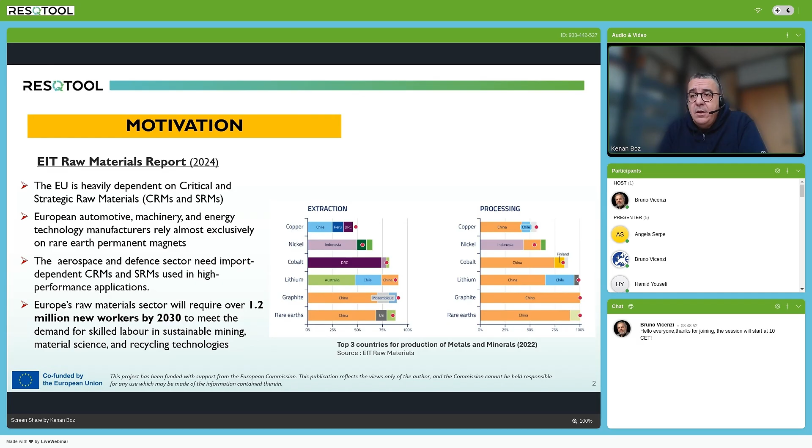And indeed, here's an interesting finding I wanted to put here: the raw materials industries in Europe will need about 1.2 million new workers by 2030, within just 5 years, to meet the demand for skilled labor in sustainable mining, material science, and recycling technologies.

So the Critical Raw Materials Act is more or less the basis of our project, the reason why the project has been funded by the European Commission. For those who don't know, the Critical Raw Materials Act is one of the most important policies of the EU, published in 2023. You can find it online and download it.

What it says is that there are some targets on the extraction, processing, and recycling of critical raw materials to increase domestic capacity: 10% for extraction, which includes mining mainly, 40% for processing, where Europe is really strong, and 25% for recycling, that is the end users such as aerospace and others. Also a diversification in sourcing of critical raw materials from outside the EU, not exceeding 65% from a single third country.

On the right side you see the critical raw materials that are in the scope of this project. That is mainly tungsten and cobalt, as well as titanium, niobium, and tantalum, which we are looking after.

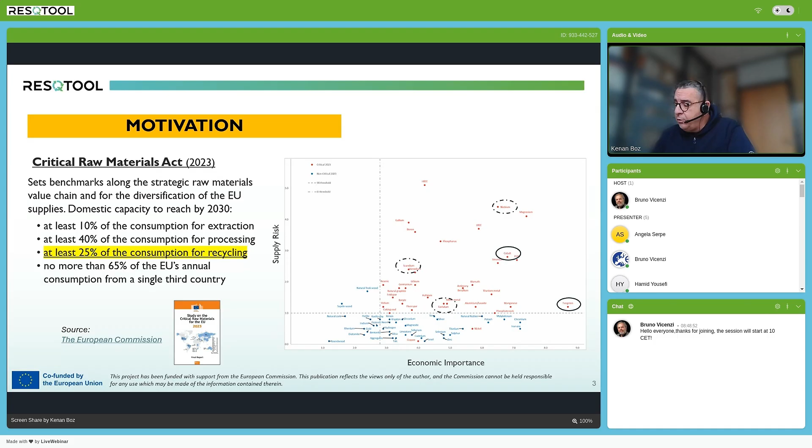So what is the motivation for the project? The third reason is a need for digitalization, that is product coding. The EU regulations on waste management for collection and transportation of hard metal scrap are really complicated, especially in northern countries such as Germany, Sweden, Norway, and Finland. So we are working on identifying hard metal scrap as a valuable secondary raw material among other scraps in the metal industry.

So coming to our project, it has a global objective of offering a sustainable and energy efficient solution for recycling and supply of critical raw materials, mainly tungsten and cobalt. But we're also working on tantalum, titanium, and niobium from end-of-life products, what we call hard metal scrap, but we don't want to call it scrap anymore, as we consider it a secondary source of raw material. These end-of-life products come from cutting tools, construction, and manufacturing devices such as drilling bits, etc.

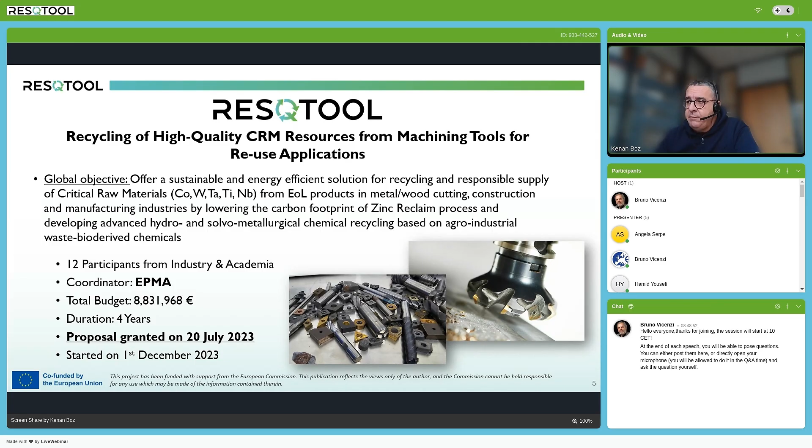So as of today, this is our current value chain of hard metals, starting by the product design and the supply of raw material, where tungsten is mainly coming from China, cobalt is coming from Congo. We make the tool production in Europe, and they are used in automotive, mining, metal, wood cutting, and other industries. In the end, the scrap is collected, and unfortunately, as of today, there's a kind of downcycling, which as a project we are trying to avoid.

What we mean by downcycling is either alloying of tool steels, where the hard metal scrap is used, or hard facing for reuse, let's say.

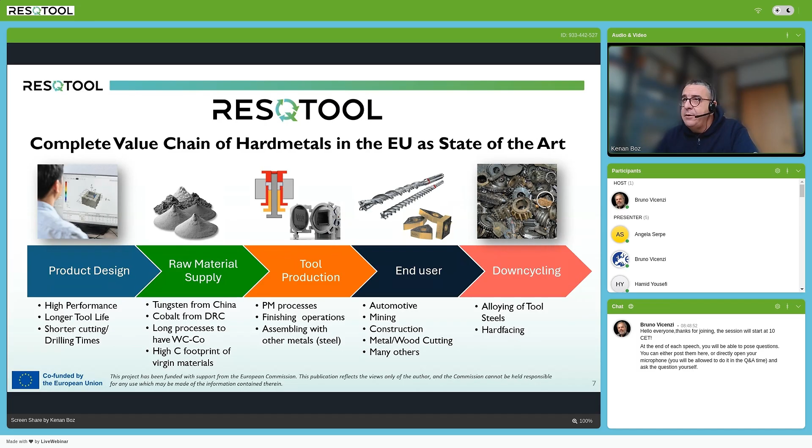So how we do it: we first identify the scrap sources by their users in the industry, and we have assigned a certain recycling code for each group to be used to determine their recycling scheme.

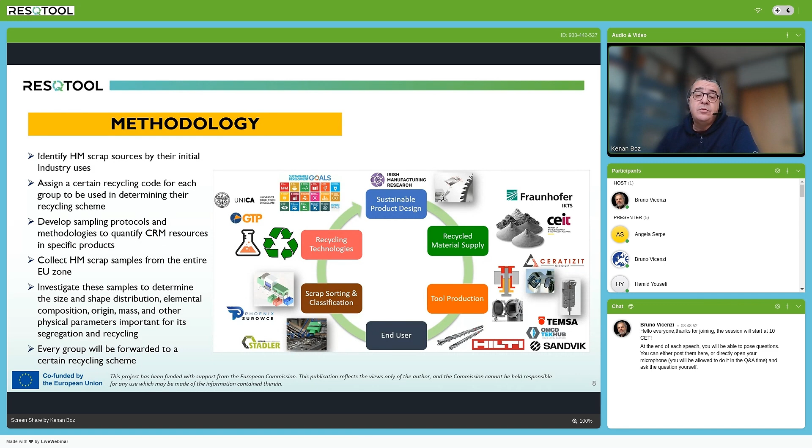We also have investigated samples that we have collected by their size and shape, composition, origin, mass, to develop the proper coding in terms of recycling as well as other projects. These codes are used for product identification mainly, but we want to include recycling detail there as well. So this is the methodology of the project.

We have defined our main framework of data where we get the hard metal scrap, and then the methods of sorting and classification, and then we have the recycling technologies development. That is, of course, all the time followed by characterization of the powder and the assessment of the final products coming from real case studies in our consortium partners.

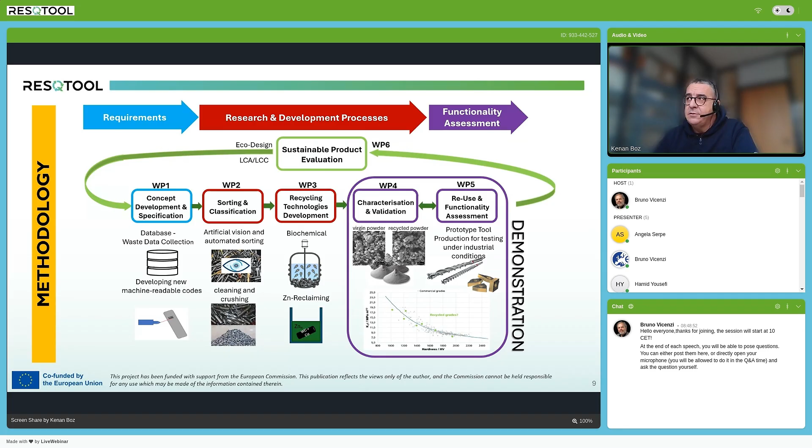And of course, all this is evaluated under the sustainability aspect using LCA methods and eco design. So today we will have two important presentations on two different recycling methods. But before that, I would like to give you a short description about the sorting and classification, which is very important as well.

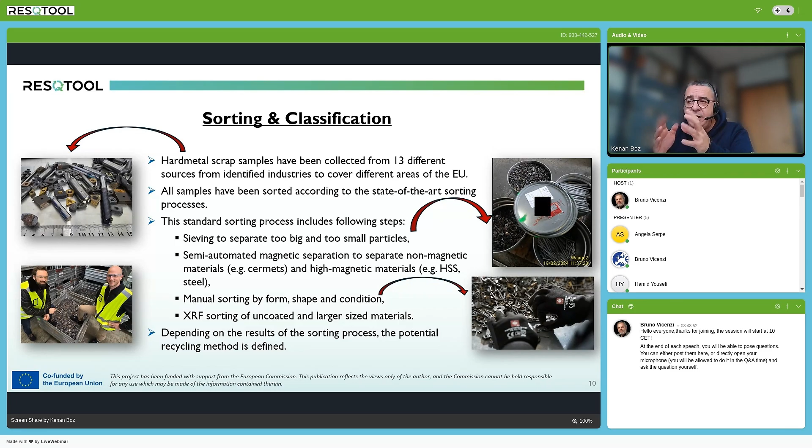We have collected samples from different countries, 13 different countries around the EU, and then we sorted them to figure out the sizes, the shapes, etc. We use different methods like magnetic separation, sieving, etc., even manual sorting to understand. We used XRF devices for uncoated and large sized materials, and we try to determine which recycling method is good for each category, let's say.

In the project, we are mainly working on developing a coding system to be used for hard metal products, and the EPMA is even leading a proposal for a standard at ISO level for that. As a consortium, we are working on the GS1 data matrix standard.

We have two main geometries of data matrix: one square, one rectangular. The square one is used for flat surfaces like cutting inserts. The rectangular one is used for rather rounded surfaces like drilling bits, milling edges, milling tools, etc.

As I said, our goal is to have a product coding that is a kind of product passport for each product, each unique with their own unique ID in terms of traceability and recycling.

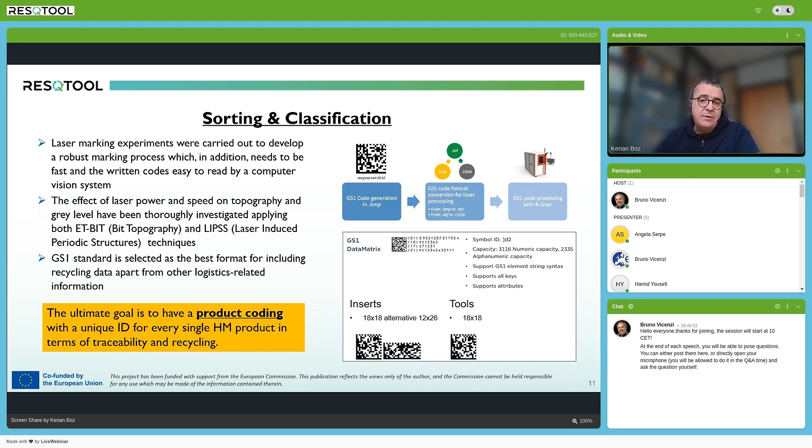So finally, basically this is the automated sorting unit we have developed within the project. As you can see, it detects the data matrix code, and depending on its chemical composition or coating, etc., it separates into different classes, where afterwards they are forwarded to certain recycling schemes.

So we have reached, well this is old news, this slide was prepared 6 months ago so I have to update it. The unit has now reached 97% accuracy, and our goal is to reach not 100 but 99.9% accuracy, so that during sorting there is no mistake, that a cutting tool is not put into the box of milling tools, for example.

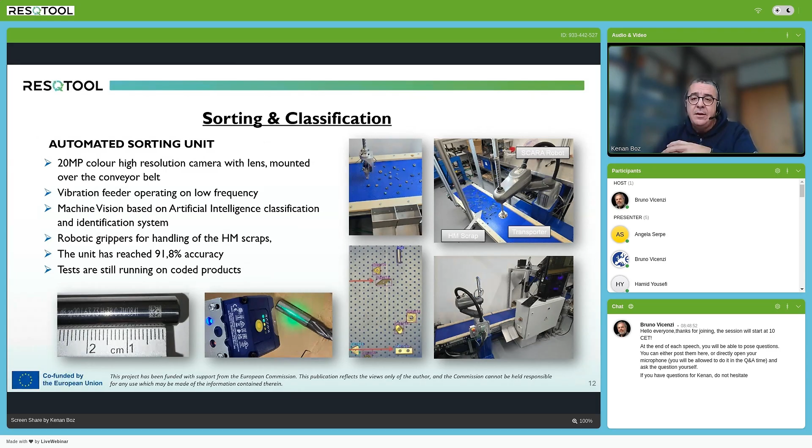So that's all from my side. Thank you very much. I would like to answer your questions at the end of the session, but now I would like to give the floor back to Bruno, because we have two important speakers after me.

Well, yeah, actually if there is any quick question now we could take it, but otherwise there will be time at the end. I don't see anything in the chat. If anyone wants to speak, I will switch briefly to discussion mode so you can switch on your microphone and camera if you want. Otherwise we will move to the next speakers. I don't see any questions yet. Okay, so maybe there will be more questions on the technical side, I guess. Yes, probably. Right, so thanks then, Kenan.

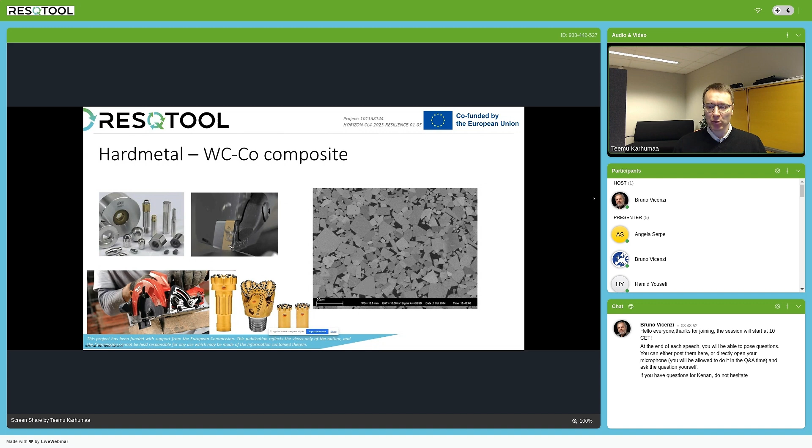As you know, hard metal tools and parts are produced via powder metallurgical methods. So the raw materials are all in powder form, tungsten carbide and cobalt, but other carbides or even other binder phases can also be used.

The materials are mixed and milled typically in an attritor or ball mill. The powders are granulated so that they are free-flowing, and after that there is typically a quality control step where microstructure, carbon balance, flowability, etc. are measured and controlled. The powders are compacted with various methods.

After compaction there might be a step of green machining, if for example cold isostatic pressing was used to press larger blocks, and out of these blocks some shapes which could not be pressed directly are formed. Then after sintering, the hard metal gets its actual properties, having the hardness, porosity, transverse rupture strength, etc.

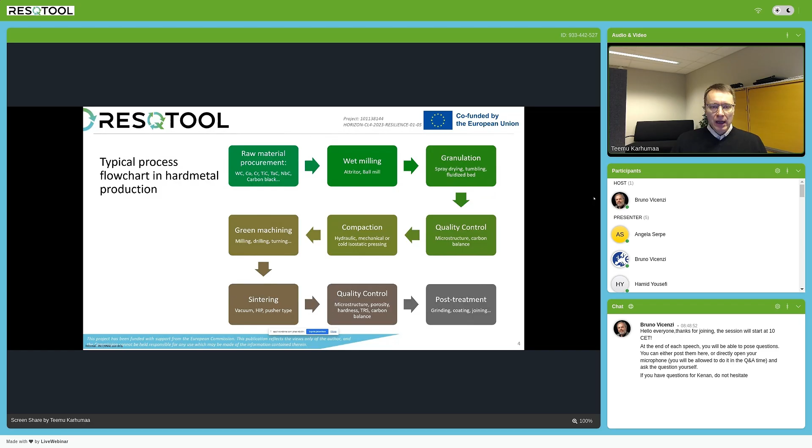Tungsten recycling market, as Kenan described, is extremely important for the European Union because Chinese mining companies control the majority of tungsten production globally, and yes, there are already existing recycling methods. About 35% of global tungsten streams comes from recycling already at the moment.

About 65% of all tungsten produced globally goes for tungsten carbide products, so hard metals. So recycling of hard metals is indeed very important to reduce the dependency on imported tungsten in the EU.

As Kenan described, we try to develop a standard for marking of tools so that they could be better recycled. In this case, we see the losses that are currently taking place here on the right side. I hope you see my pointer. A high amount of tungsten goes to losses.

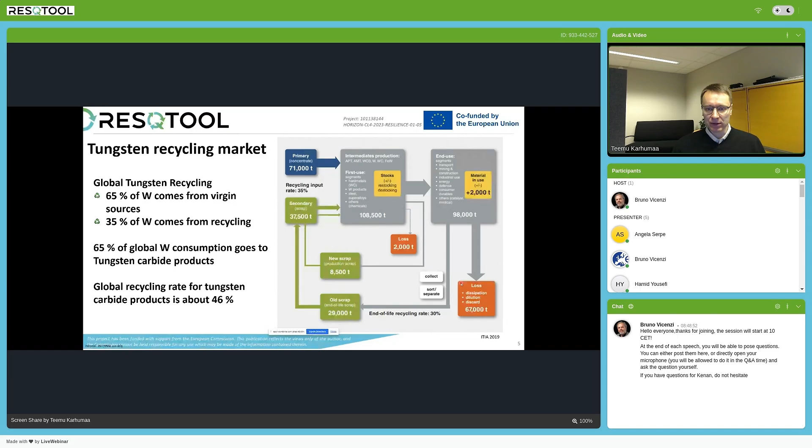Hard metal scrap can have different shapes, forms and geometries. In this case, we have here, just as an example, some metal cutting inserts or cold forming tools, mixed scrap from any kind of applications, drills and end mills, mining buttons, or blocks from EDM machining.

Currently, the sorting of hard metal scrap is done manually based on the application. So the person doing the sorting recognizes this is indeed a metal cutting insert, or this is a drill or end mill. They put them into the different categories.

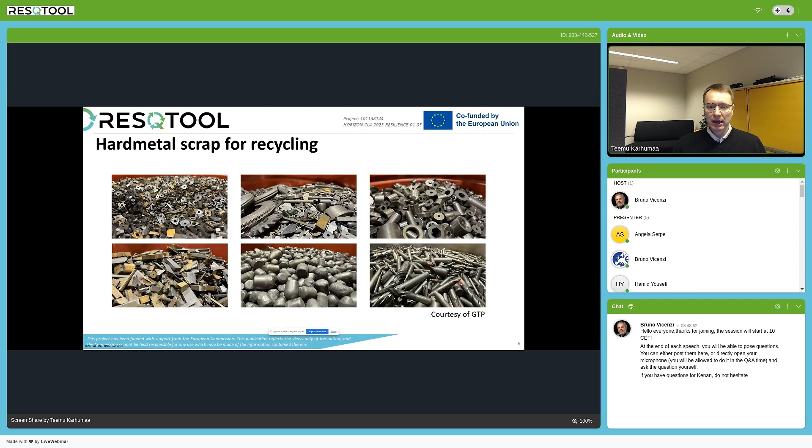But if there is no application known, then all this material goes to mixed scrap, and this share we need to improve. So by marking the tools, we can recognize the hard metal grade composition, tungsten carbide grain size behind, and these scrap grades can be better recycled in the future.

There are also hard metal scraps, or tungsten containing scraps, in the market which are called soft scrap. So they can be turnings from machining of tungsten containing materials, then sludges from grinding of hard metal drills and end mills, for example, or any kind of powders which were generated during the production of hard metal parts.

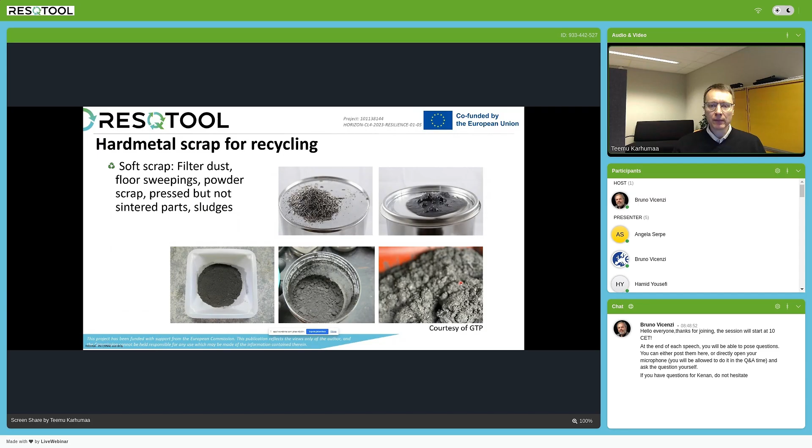All these scrap or secondary raw materials, as Kenan mentioned, can be recycled via several methods, and here I try to describe three different methods. But if we look at the big picture of hard metal tools and how the hard metal recycling value chain looks like, everything starts, of course, with tool design.

It's actually a very important phase where many characteristics of how the hard metal can be recycled afterwards are already defined. But after using the hard metal tools, they reach end of life and can be either reused directly, like grinded and coated again, or they can be crushed, with material going to hard facing, or then they can be leached.

So solid hard metal tools can be leached. The material which was leached away goes to different chemicals, and the remaining tungsten carbide goes to tool production again.

Zinc processing is just a crushing and grinding process, which I will describe later. Via chemical recycling, all kinds of hard metal or tungsten containing tools can be recycled.

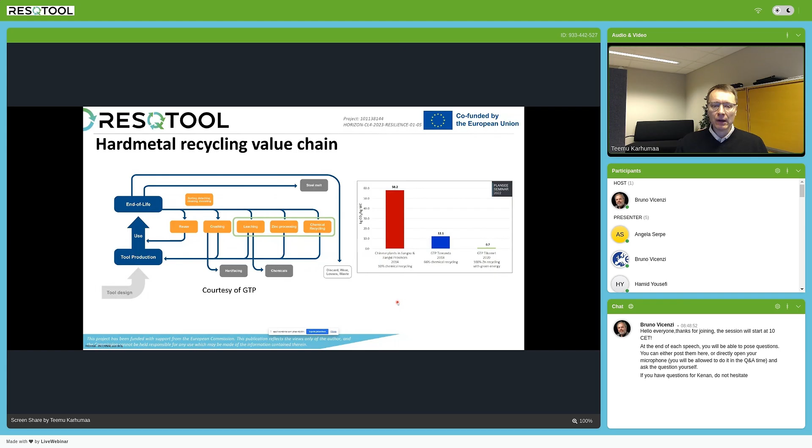Under the RESQTOOL project, we try to evaluate with colleagues from IMR the CO2 emissions from the process in more detail. So these are the 3 recycling processes which I'd like to describe a bit more in detail.

Leaching of sintered hard metal scrap: the cobalt binder of the hard metal scrap can be removed. We use strong acids, and after leaching of the binder, the remaining tungsten carbide mass or powder can be used for the production of new tools.

In the leaching of sintered scrap, there are some challenges because the leaching time can be very long due to the long diffusion lengths, and the tungsten carbide grains may oxidize. Coatings may create some diffusion barriers as well, and if there are nickel binders or chromium molybdenum in the binder as a grain growth inhibitor, they may complicate the required chemistry even further.

Then zinc processing, as I already said, is more or less a crushing and grinding process. Zinc just makes it easier to crush the sintered hard metal parts. There's nothing more than making the sintered scrap back into powder form. You see here how the scrap looks before and after the zinc processing, and then how it's in powder form after the processing. I'll describe a bit more detail about how that happens in a couple of minutes.

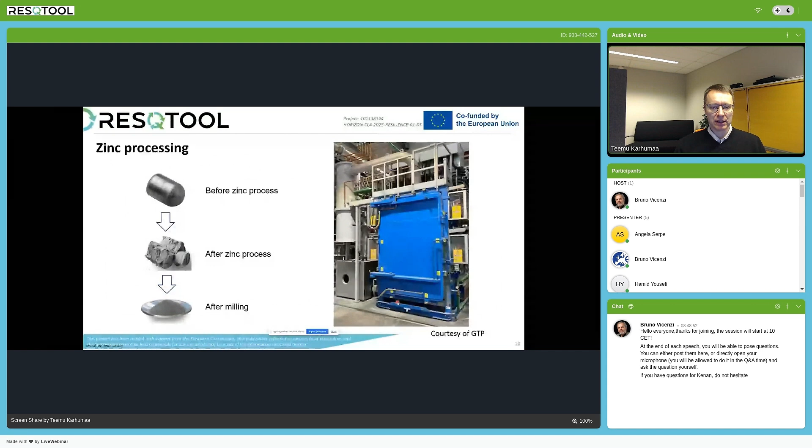Then the full chemical recycling method, which is normally utilized and owns the majority of the market share in the hard metal recycling market: the tungsten carbide, cobalt, and other elements are oxidized and dissolved into sodium hydroxide, and then there are complicated steps of solvent purification and filtration, and then ammonium paratungstate is the outcome from the hydrometallurgical processes.

This is then calcined to tungsten oxide. The tungsten oxide is reduced to tungsten powder, and this is then carburized to tungsten carbide powder. As you can imagine, with 3 different pyrometallurgical steps and many hydrometallurgical steps before that, the energy consumption of chemical recycling is indeed very high.

But it's only the method, more or less the only method, to recycle soft scraps and sludges, or very contaminated tungsten-based secondary raw materials. On the other hand, the quality after chemical recycling is the same as from virgin raw materials, so high quality and high purity materials can be achieved.

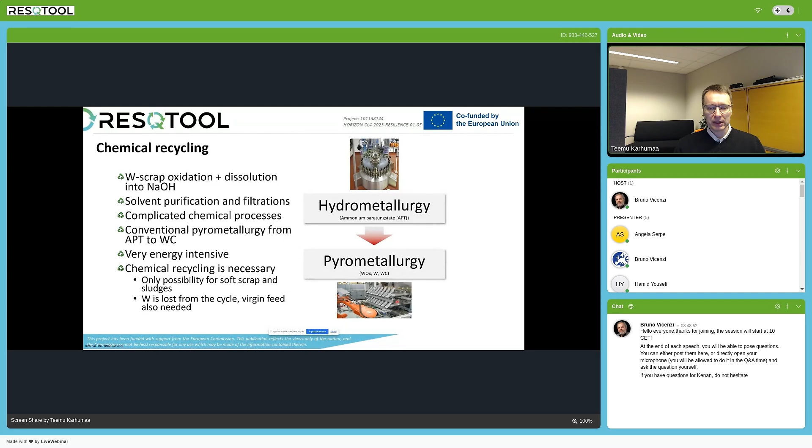Then I would like to touch a little on the zinc processing history. The earliest patent or publication on zinc processing comes from the year 1944, where a company in UK described how hard metal scrap and zinc, put in an oven together, formed a zinc-cobalt alloy, and they described how this alloy of zinc and cobalt can be dissolved with sulfuric acid, and the remaining tungsten carbide can be recovered and used in the production of new tools.

This process was not utilized on a very large scale until Paul Barnard in 1971 patented a process continuation for it. The distillation of the zinc instead of leaching improved the process a lot, and then that process started to gain market share.

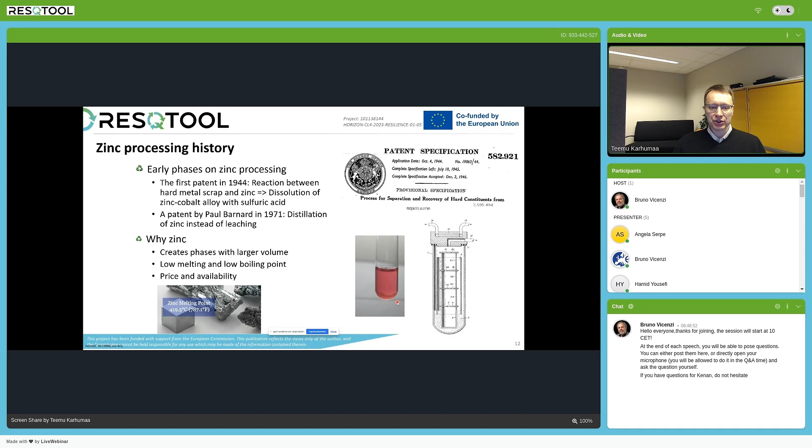This process was more or less designed and developed in the US by two companies, Metallurgical Industries and Wah Chang Teledyne, in Huntsville, USA. One furnace from Metallurgical Industries came to Belgium, to Coldstream, later Höganäs. Once Höganäs decided to discontinue hard metal recycling in Belgium, they sold two second-hand furnaces to a powder customer in Finland, which was at that time named Tikomet. That's why we are working with zinc processing here at GTP Finland.

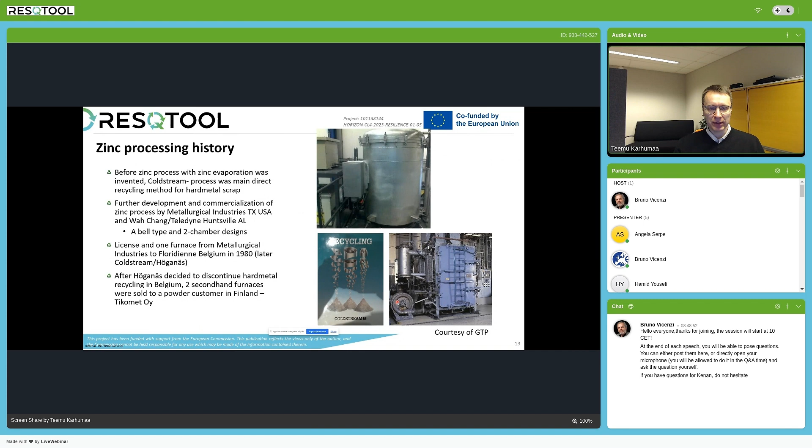Tikomet was founded in 1994 for production of hard metal pins for winter tire studs, which you see here in the right pictures. Raw material was initially acquired from Höganäs in Belgium, so zinc recycled powders. Then in 1995, the production of hard metal powder via zinc processing started with one furnace, and we have increased capacity since then, step by step.

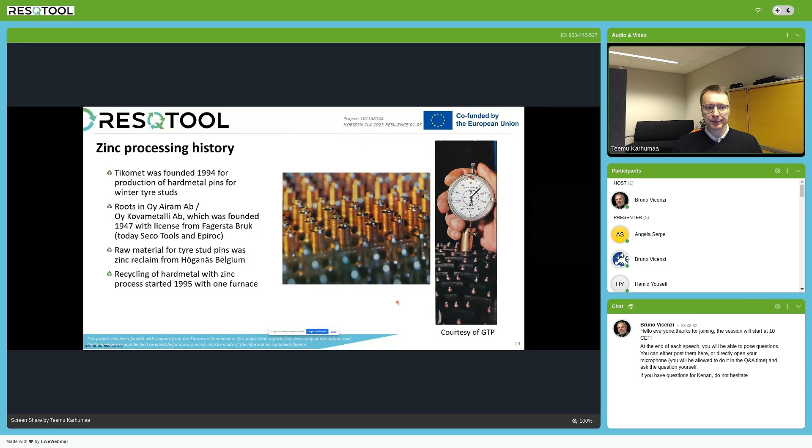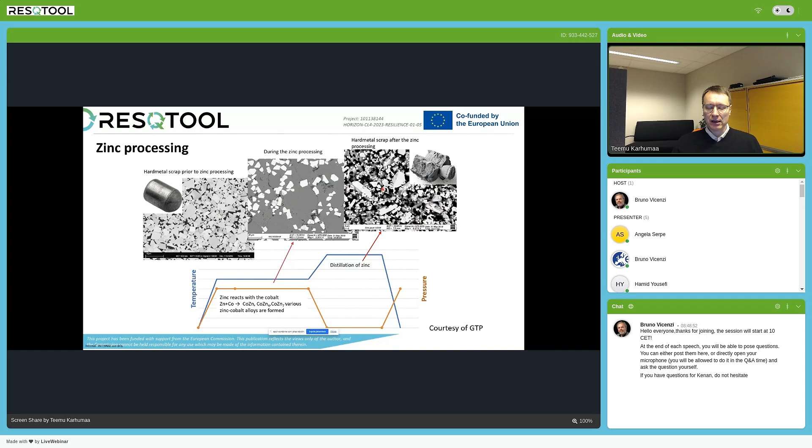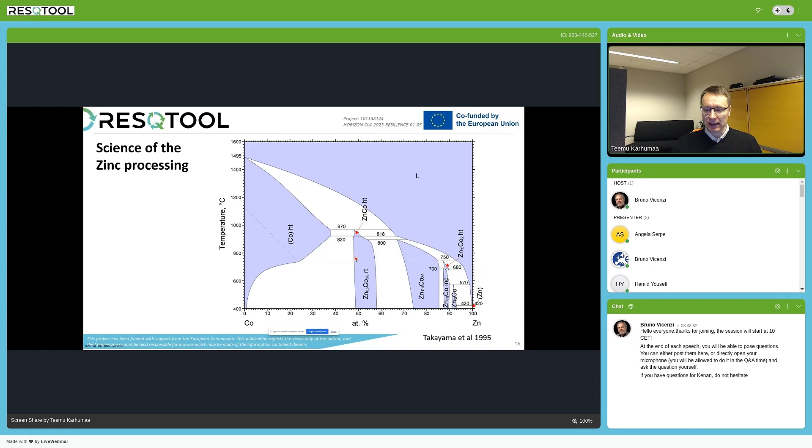We can also have phases in the structure which have a higher amount of zinc, and on the other hand, we know that there is also dissolution of the cobalt from the hard metal parts into the molten zinc. So in this case, we start moving from this part of the diagram towards the center. So we have multiple phases existing at the same time in the reacted material.

Going back once again, after this reaction has happened, as I described earlier, there is an evaporation step during the zinc processing, and the zinc is evaporated and then recovered afterward. So the zinc used for the process is used again and again. Only a small amount of zinc is lost and needs to be replaced.

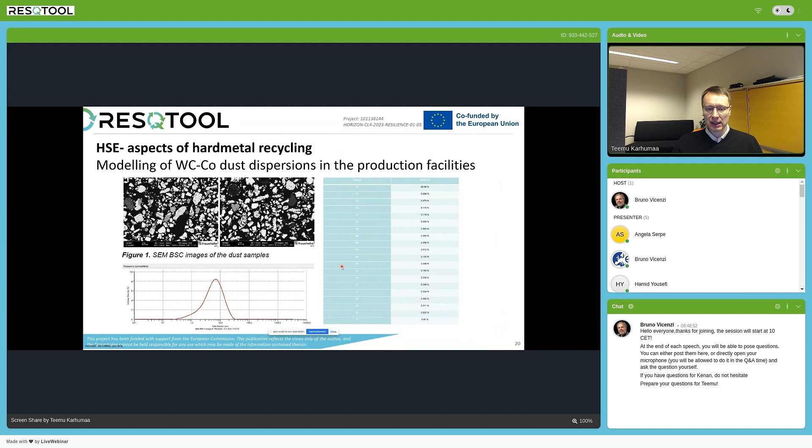Then we carried out computational modeling of how we measured all the airstreams coming in and leaving out from the production facility, and checked how that dust would spread with the airstreams. We were surprised how high in the production facility the dust can go and how long it can stay in the air.

Now we are thinking about measures to prevent the clean and dirty air from mixing, so that we could keep some areas more clean where the employees stay, and remove the dirty air at other areas.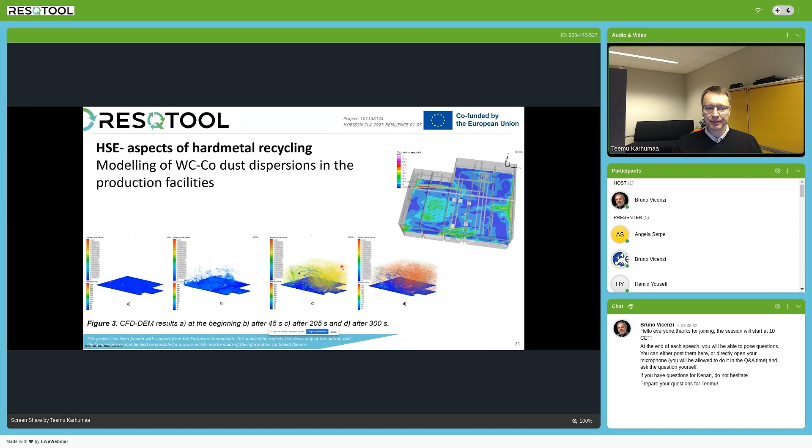We have measured the dust concentrations in various places in the production facility, and indeed there are some peaks - not very high, but we still recognize there are differences in the dust concentration. Some days can be very good, with very low concentration, but on some days the concentration can be very high, and we need to find out the reasons for these dust leaks.

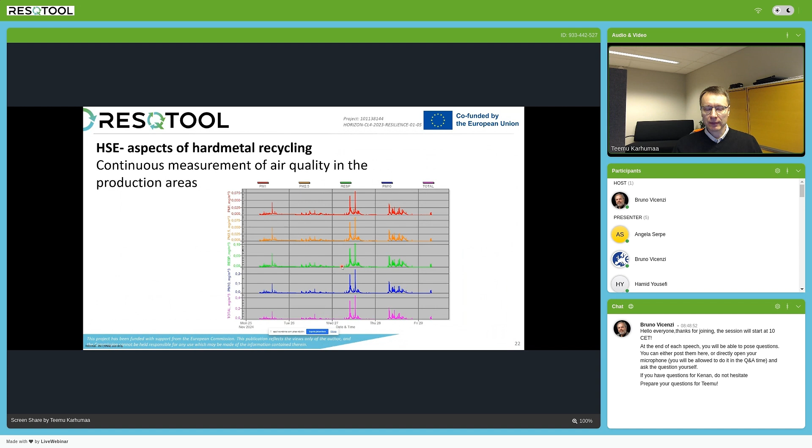The last point I'd like to discuss a little is the energy consumption of hard metal production and in recycling. There are some studies on the production of 1 kilo of sintered hard metal from different raw materials, looking at the cumulative energy demand for that 1 kilo of sintered hard metal.

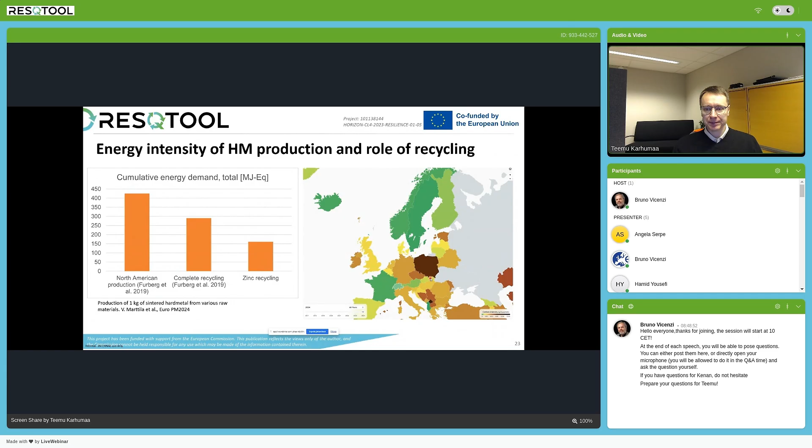In the RESQTOOL project, we have studied how we could utilize the waste energy streams from the zinc processing furnaces. These furnaces are cooled with cooling water - they have chamber furnaces with double walls and cooling water between them. Currently, the waste energy is mainly vented outside, so it's essentially wasted.

We have studied if we could increase the temperature of the waste heat so high that it could be pumped to the district heating network. That would require a rather large heat pump facility to increase the temperature of the furnace cooling water to around 100 degrees C, which could make it possible to pump the energy to the district heating network, so that neighbors and the surrounding area could utilize this energy.

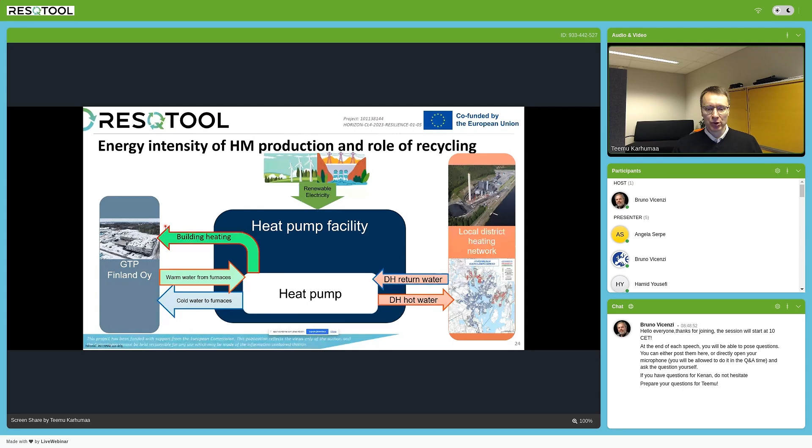Unfortunately, so far the calculations show that the district heating network owner pays very little for such energy, so we are currently concentrating on the other side: trying to utilize and plan how to use the maximum amount of generated waste heat to heat our own buildings and production facilities, and more or less get rid of the district heating currently bought to heat the buildings.

So let me come to the conclusions of my presentation.

We believe that the recycling of hard metals and tungsten will increase in the future for environmental reasons, especially CO2 emissions, because global warming is really taking place and we need to tackle that. On the other hand, due to strategic reasons, as mentioned earlier, Europe is very dependent on imported tungsten, and we need to make the European Union more independent in that regard.

But we also believe there are economical benefits from recycling. By utilizing recycled streams or secondary raw materials, hard metal producers can gain some savings as well. We just need to develop the recycling processes further, not only zinc processing, but also the chemical recycling processes, which will be described in the next presentation by Angela.

The most important point is to recover and collect all the scraps from the market to be able to recycle more materials, because currently the recycling market share growth is limited due to the lack of suitable raw materials. By marking the tools, we can create opportunities for direct recycling processes, but on the other hand, we still have too much losses of the materials from the supply chain.

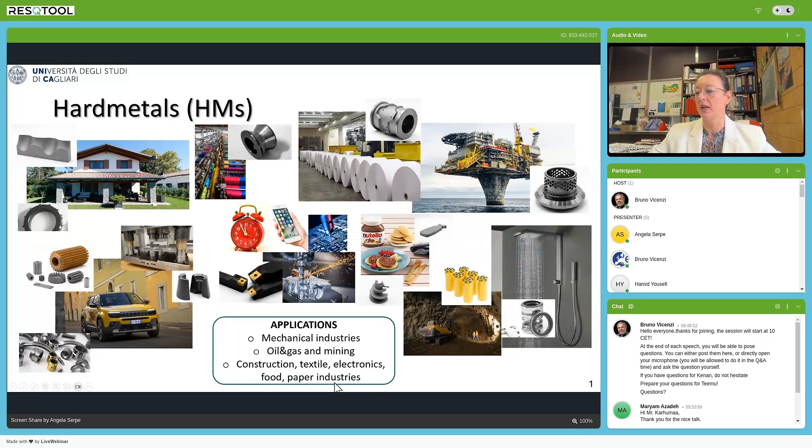As you know, hard metals have a variety of different applications, including the mechanical industries, oil and gas and mining, construction, textiles, etc. And as Kenan anticipated, tungsten and cobalt, the main components of hard metals, are both critical and strategic raw materials for the European Union, but also globally speaking. So waste represents the best resource today for facing the problem of the supply of these materials.

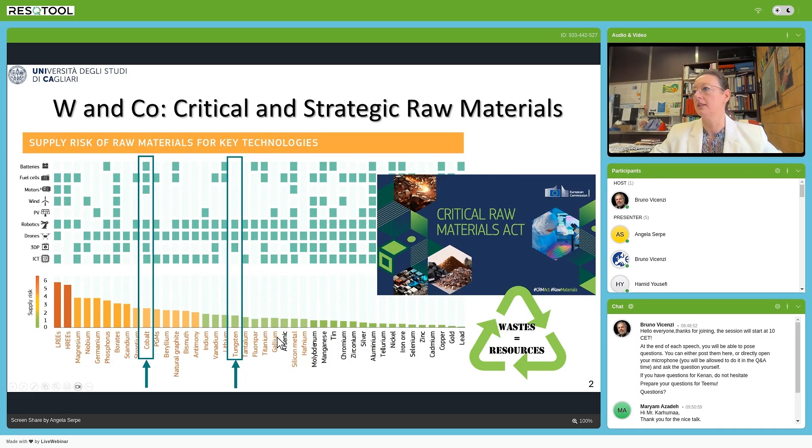Teemu already spoke about the possible recycling methods of tungsten and cobalt from hard metal waste. I will just spend a few words to focus on the importance of the chemical approach to recycling, taking into account that chemical leaching and recovery may add to the direct recovery methods.

Indeed, the zinc process is part of the so-called direct methods that are addressed to obtain hard metal powders that can be reused for hard metal manufacturing purposes. The approach is to form voluminous and brittle phases that can be ground and then provide a new powder that contains the same amount of cobalt and tungsten as the former, starting material.

The pros are that this kind of process does not involve chemicals in production, and does not produce wastewater at the end of the process. Of course, they involve a few steps for obtaining a material that can have properties closer to those of the raw materials.

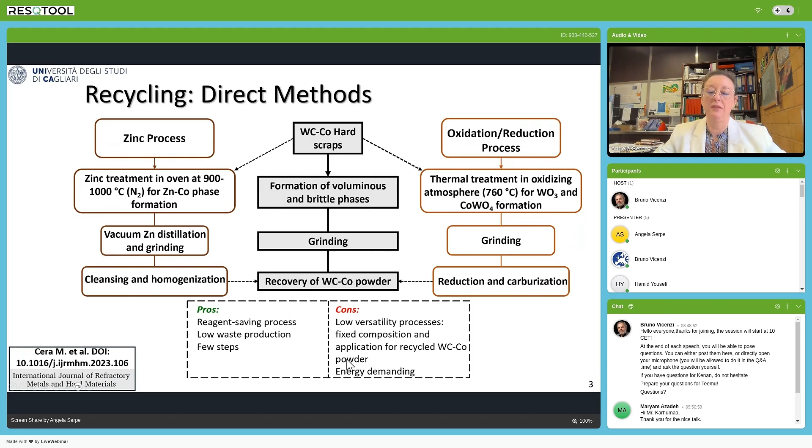So on the other side, we have the chemical methods. Teemu already mentioned this kind of approach. I just wanted to underline that these chemical methods always, or often, exploit thermal treatments, and typically provide an intermediate species like tungsten oxide that is treated by using strong alkaline solutions or directly an alkaline melting, using a large amount of strong bases.

Then to obtain the different products, the different semi-finished materials for manufacturing purposes, there are several chemical transformations that require a quite wide amount of strong chemicals.

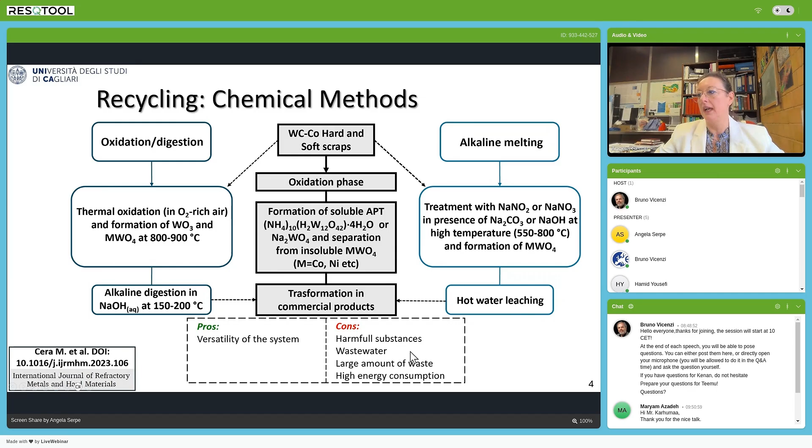Of course, the main pros are the versatility of the system, and the quality of the recycled materials that can be reused for a variety of applications, like the ones obtained from concentrates from mines. The cons, of course, are the use of a large amount of harmful chemicals and the production of wastewater that should be treated in a certain way, accompanied by higher energy consumption.

There is an intermediate process, called by Teemu leaching, which is a selective dissolution of cobalt, the most reactive component in the tungsten carbide cobalt mixture system, which can be dissolved by using, for example, strong inorganic acids.

As Teemu anticipated, this approach is selective, so we can reuse to a certain extent the tungsten carbide that remains unreacted. But the use of strong acids, particularly strong oxidizing acids like nitric acid or sulfuric acid, often causes oxidation on the surface of the material. This oxidation requires a further reduction step, a thermal reduction step, to obtain again the tungsten carbide cobalt material with characteristics suitable for hard metal production.

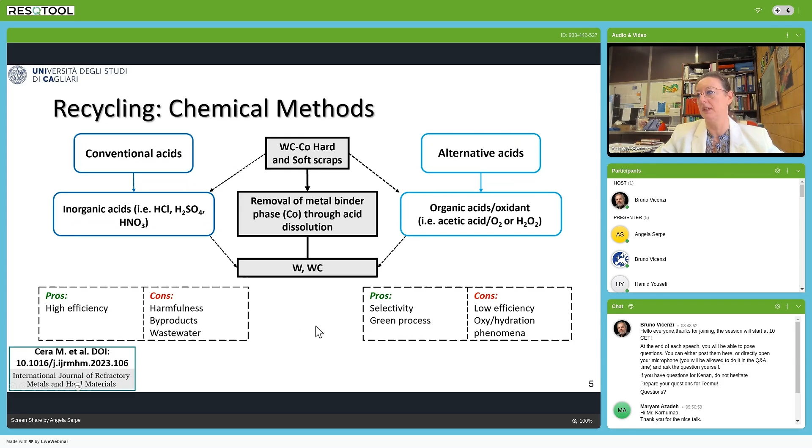Organic acid demonstrated a peculiar capability to interact with cobalt, but also historically is known that tungsten in some cases is able to interact with organic acid in specific conditions.

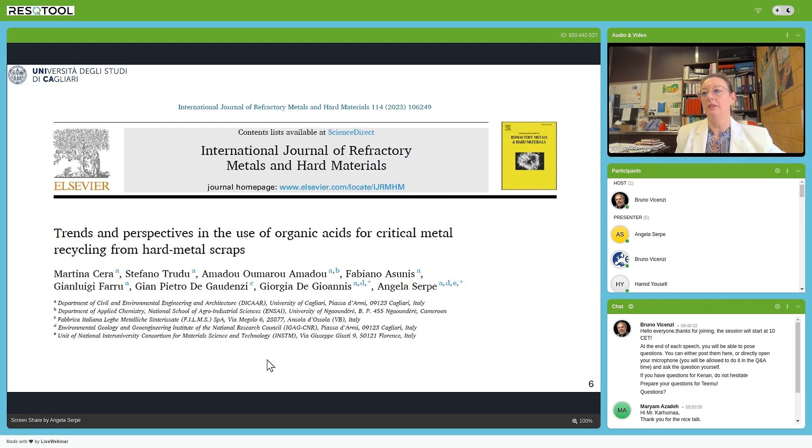In this review paper, we made an excursus on the different chemical methods adopted during this last century to treat both the raw materials and also the hard metal scraps in order to valorize the tungsten and cobalt present in the mixture. In particular, we focus attention on the use of organic acids on different semi-finished materials in order to obtain a more sustainable recycling of these critical metals.

This kind of approach has been used in the RESQTOOL project, trying to implement low-impact chemical methods for the recovery of critical raw materials from tungsten industrial scraps, in particular based on the use of bio-derived organic acid.

The idea is to exploit the peculiar chemical behavior of tungsten and cobalt towards organic acids, which are present in different oxidation states in the material.

The idea is to produce valued recovered material which is as flexible as the recycled material obtained by conventional chemical methods, for using them in hard metal industry, increasing the rate of recovered materials with respect to virgin ones in hard metal production.

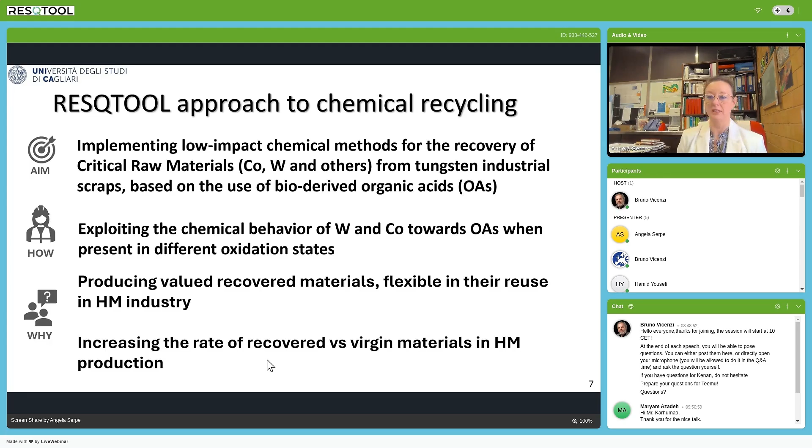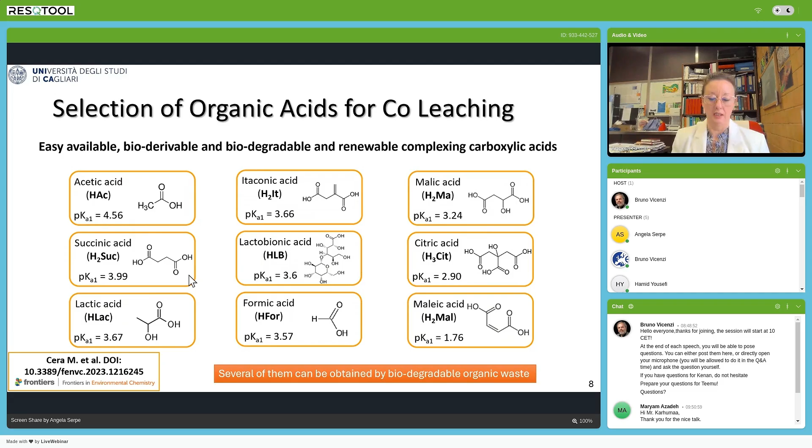In this study, a selection of organic acids has been made. These organic acids are all easily available, bio-derivable, biodegradable, and renewable. They are all carboxylic acids that show capability of complexing metal species through the carboxylate entity. These acids, or part of them, can also be obtained from biodegradable organic waste through easy transformations, so they can be generated directly by, for example, agro-industrial plants or activity.

In this slide, I would like to show you a study we did on the behavior of organic acids toward a metal like cobalt.

Organic acids are a family of carboxylic acids, and they are less strong acids with respect to conventional mineral acids. In particular, they are considered weak acids because their pKa are... so they can behave like acids, but they don't have the same strength as acids towards different compounds, because they can have different pKa, and some of them can be considered stronger than others.

Through this kind of study, we were able to define two main classes of organic acids, because in the metal leaching from, for example, tungsten carbide cobalt alloys, to bring cobalt into solution we need an oxidizing leaching - the oxidation of cobalt to cobalt 2+, and the formation of a soluble species that can be dissolved in the leaching solvent.

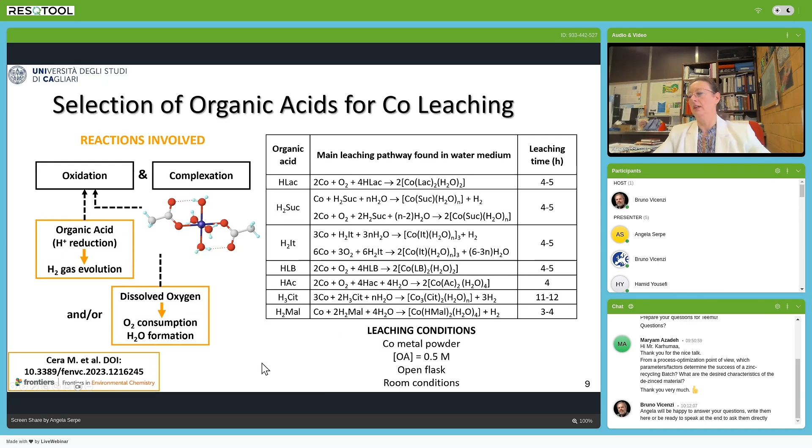When we observe the formation of hydrogen as a product, it means the organic acid is playing the role of oxidant in the reaction. Reactions that don't produce hydrogen instead proceed through oxygen consumption - oxygen dissolved in the mixture oxidizes the metal, making it available for coordination. So as you can see in this table, not all organic acids behave in the same way.

For this reason, we made a study in water solution to highlight the possibility for different acids to play the role of oxidant in the solution or not. We divided these into two classes, class 1 and class 2 acids, where acids with a lower pKa and higher capability to coordinate the metal may play the role of oxidizing agents in solution.

Instead, acids with a lower pKa—speaking of the minus log of the constant—when we have a lower pKa, we have a stronger acid. So, when we have a lower pKa and a higher K formation for the complex, we have a stronger acid, a class 1 acid that can behave like an oxidizing agent. When we instead have a higher pKa and a lower Kf, we have a class 2 organic acid that does not behave as the main oxidizing agent in the solution.

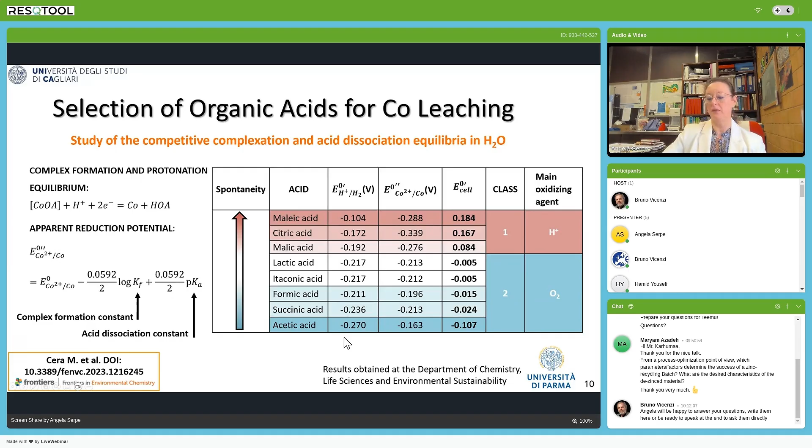So here you can see the behavior of the two classes of agents. Class 1 is able to dissolve the metal in water, but so can class 2, because a certain amount of oxygen is dissolved in water. We also observe that forced aerating conditions may help the efficiency of the reaction.

This classification is important because it means that when we have oxidizing acids, we can work also in solvents different from water. This is important because the presence of water when leaching tungsten carbide cobalt alloy can promote oxidation phenomena on the surface. So avoiding water can be an option for treating this kind of material, avoiding oxidation on the surface.

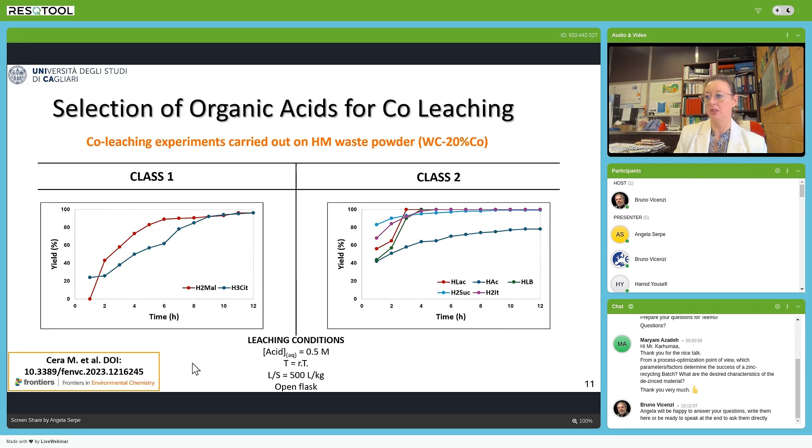The studies on these different acids and their different behavior on cobalt are reported in this recent article, which can be interesting for those more interested in the deeper chemical aspects.

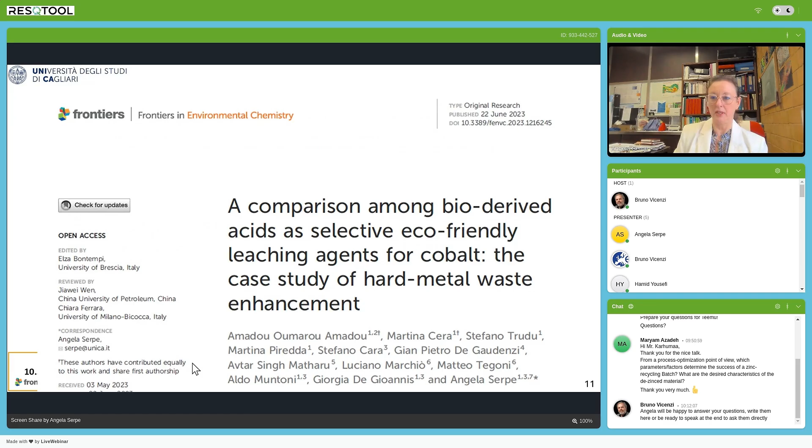Now we can see the application of this kind of approach to the real material that can be provided, for example, by a thermal regeneration process that is able to produce tungsten carbide cobalt powders starting from end-of-life tools. In our case, this regeneration process is carried out by OMCD Tek Hub.

Through a first oxidation step that provides oxidized powders, then a reduction step that provides reduced powders, and a further carburization step that provides the final WCCo powders.

If we are able to interact with cobalt and tungsten on the different semi-finished materials obtained in this regeneration process, we can, in principle, be able to tune the composition of the final material, obtaining the desired tungsten carbide cobalt mixture for industrial purposes.

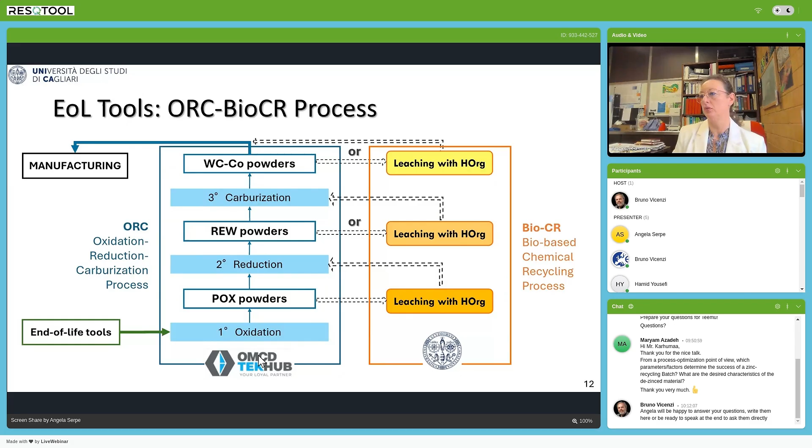Here is reported the application of solvometallurgy leaching using maleic acid on an already reduced tungsten carbide cobalt powder, where cobalt is present at 20% in the mixture. We applied the leaching selectively on the material, trying to reduce the amount of cobalt from 20% to a desired 6%, in order to obtain a material specific for a certain industrial application.

We treated the material inside a 30-liter double-walled reactor, in the presence of an ethanol solution with a 1 molar solution of maleic acid. The reaction was performed at room conditions—room temperature and pressure—for 6 hours.

In this graph on the right, you can see the XRD pattern of the material before the treatment. The pink pattern is related to the pristine material, where the two phases, tungsten carbide and cobalt, are visible. The green graph reports the material after 6-hour leaching, where the cobalt is difficult to see in the pattern.

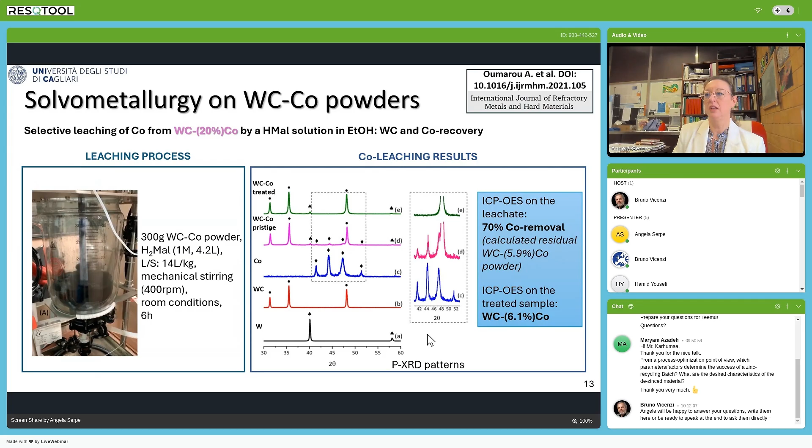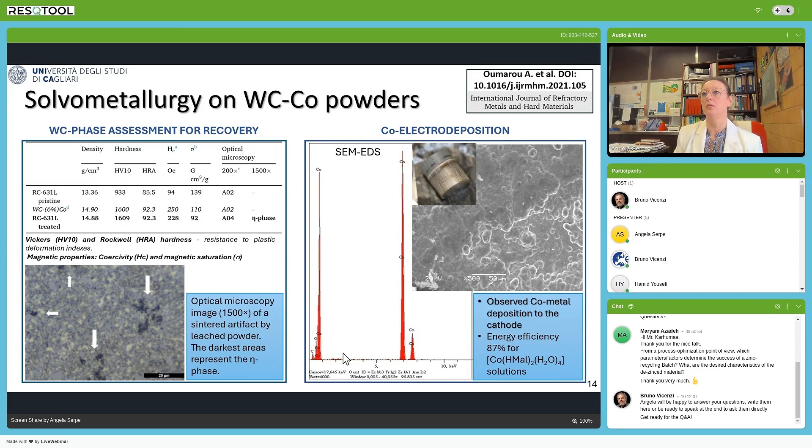So this is an example of how we can play on the coordination chemistry of organic acids towards cobalt to promote selective leaching of tungsten carbide cobalt mixtures, avoiding oxidation phenomena by using solvometallurgy instead of water as the main solvent. The results are shown in this paper, which you can find in the literature if you are interested in more details.

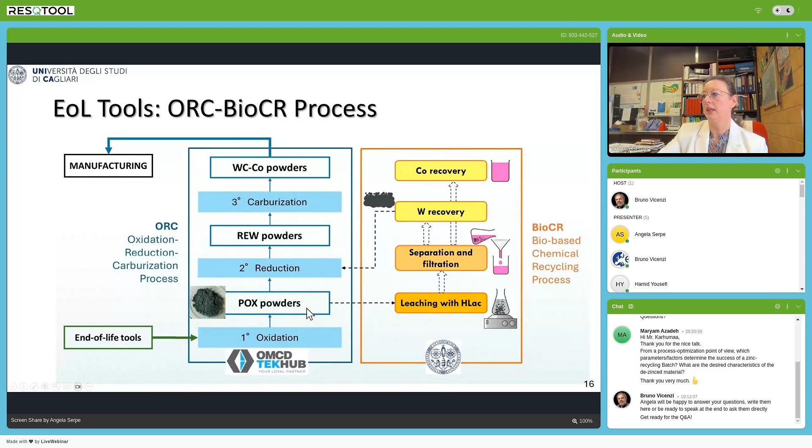The second approach, the one that we are studying in the RESQTOOL project, is the treatment of the oxidized powders from the regeneration process by OMCD Tek Hub. The oxidized powders contain mainly, as you can see in this picture, two phases: tungsten oxide and cobalt tungstate, which have completely different chemistry with respect to tungsten carbide and metallic cobalt.

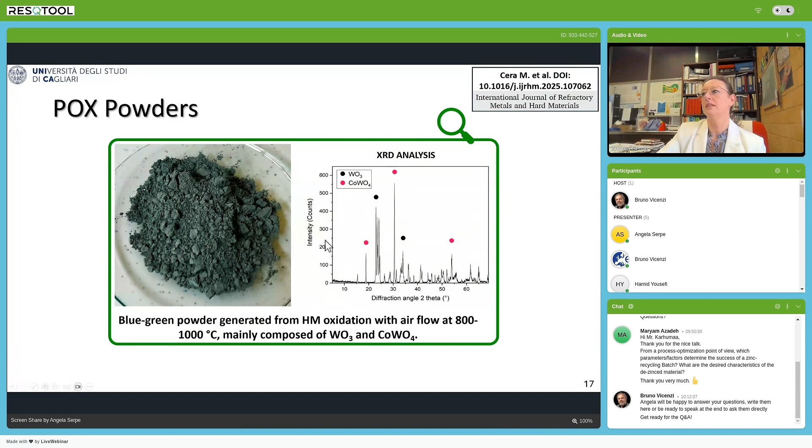So in this mixture, cobalt reacts with lower reactivity towards organic chemistry, organic acids, with respect to the reduced powder. Instead, tungsten is more prone to react with organic acid.

Also, we can proceed by steps using renewed solutions for dissolving increasing amounts of cobalt and tungsten. Through this process, we were able to dissolve both metals, though if we would like just to change the amount of cobalt into the solution, in particular decrease the cobalt amount, it would not be necessary, because tungsten can remain in principle in the solid residue.

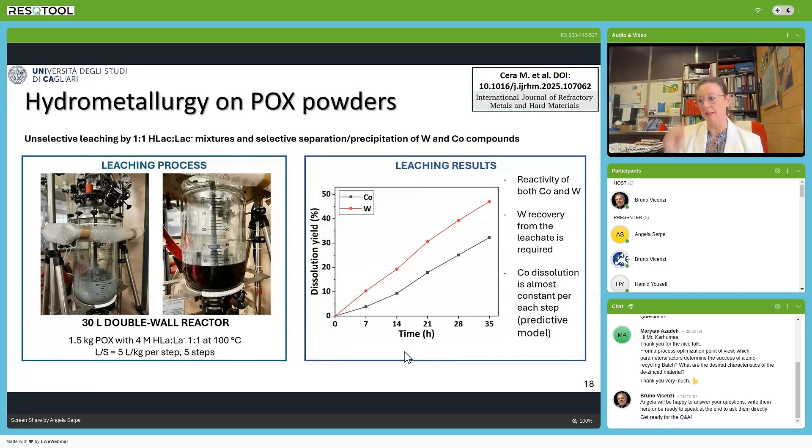But it is really interesting when we have other metals in the mixture, because in that case we are able to dissolve both cobalt and tungsten and obtain the selective recovery at the end of both metals, avoiding contaminants or metals that are not desired in the mixture.

If you see here in this image, of course, the organic treatment on the oxidized powders has the benefit that thermal treatments are already planned in the regeneration process for obtaining tungsten carbide materials.

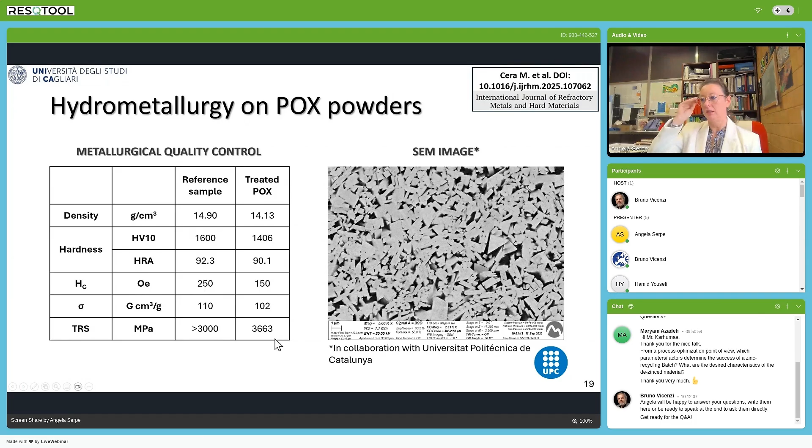So the recovered materials that underwent leaching were then treated by thermal process for reduction and carburization, obtaining tungsten carbide cobalt material very, very good in properties, with TRS values good for practical applications.

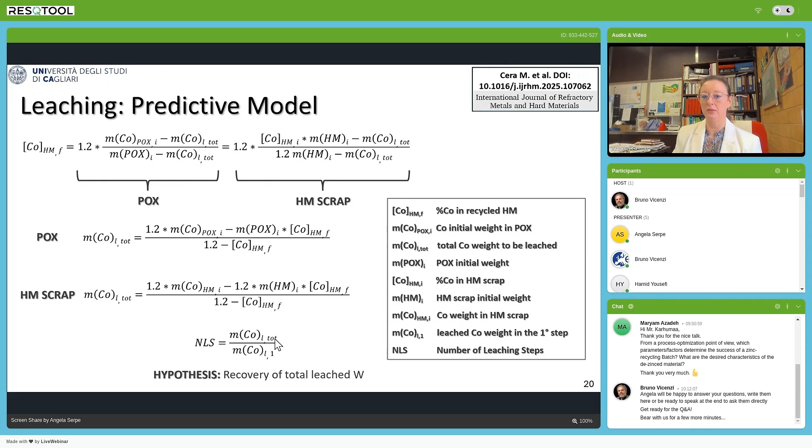The fact that we can divide the process in different steps made us able to design a predictive model to predict the number of stages that we can apply on the oxidized material to obtain a final tungsten carbide material with a specific composition. Of course, if we leach cobalt and tungsten from oxide material, we then have to recover them from the solution in a selective way.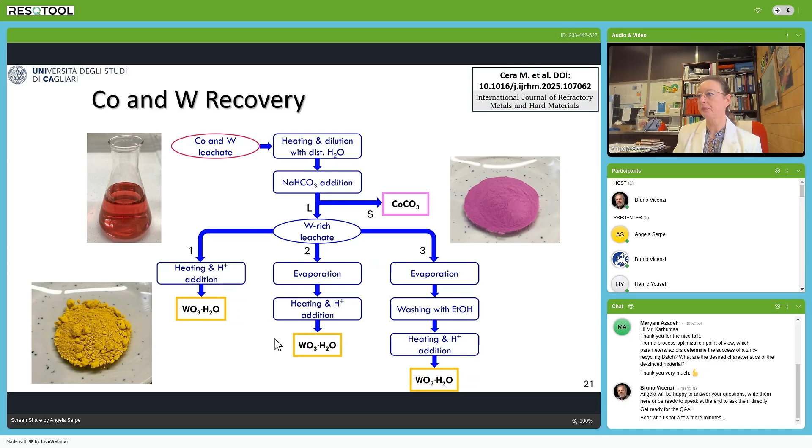So typically cobalt is recovered from the leaching solution as a carbonate precipitate, adding bicarbonate salts, and instead tungsten oxide can be precipitated in acid environment. So also this part has been published, and you can find more details in this paper.

Just for concluding this presentation, we focused a lot on the behavior of lactic acids because from among the different acids, it behaves really, really well with both cobalt metal and cobalt oxidized and tungsten 6, and so is really, really suitable for practical application.

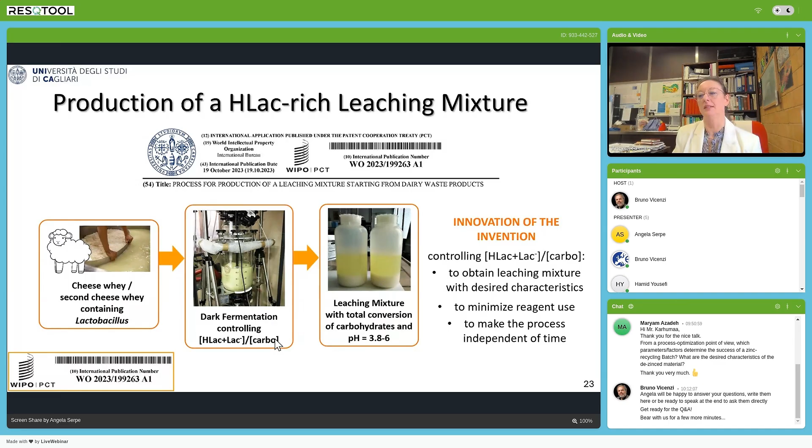On the other side, we were able also to obtain a mixture rich in lactic acids starting from cheese whey, obtained as a waste from agro-industrial processes. So in this patent, we protect the innovation to obtain a mixture just through one step fermentation, a mixture that has exactly the properties that we need for leaching metals present in several kinds of technological waste.

In conclusion, organic acids demonstrate a good efficiency on regenerated powders, both in reduced and oxidized state, in mild conditions for the hard metal waste valorization. This kind of green leaching may add versatility to thermal recycling process, and the predictive model allows to systematize the process. They obtain recycled hard metal as a quality accepted by the market, so this is encouraging us to go towards this goal for trying to limit the amount of harsh chemicals in the recycling process.

Preliminary but promising results to design eco-friendly alternatives to more impacting recycling methods have been obtained and are at the base of the activity of the RESTOOL project, that is addressed to increase the reuse of secondary materials, limiting the recourse to primary sources, and trying also to limit the use of harsh conditions and energy for recycling.